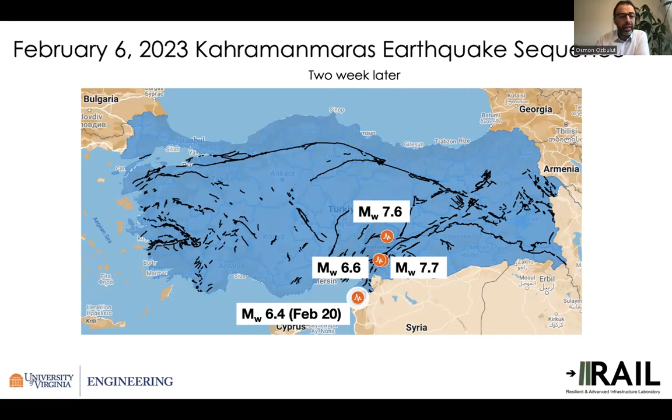About 2 weeks later, there was another aftershock in the region. That earthquake had a magnitude of 6.4 and affected mostly the southern province of Turkey. It also reached a significant intensity, so that's also an important event to consider.

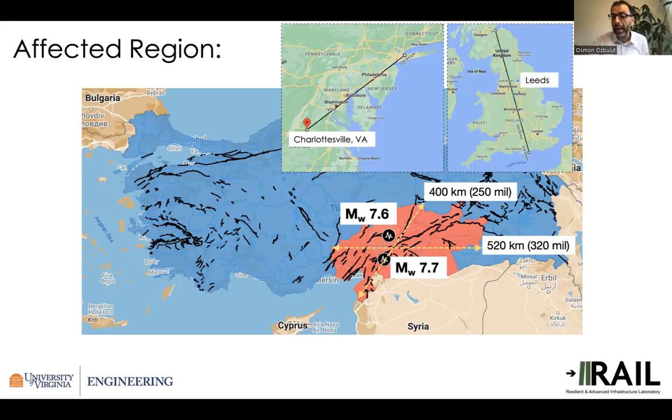So overall, after those events, 11 provinces in the southeastern part of Turkey were affected. When we look at this region, it's about 320 miles wide and about 250 miles in the north-south direction. To get a better sense of this region, if we compare this distance from Charlottesville, Virginia, where the University of Virginia is located, it goes up to New York City. And currently I am at the University of Leeds for my sabbatical, as Professor Ricles mentioned—when we compare this region, this 320 miles on the map is almost the entire United Kingdom.

The damage, or the affected region, was geographically really wide, and the damage to buildings was also really extensive. So maybe over 230,000 buildings collapsed or were tagged as needing to be demolished immediately, or were heavily damaged.

These over 230,000 buildings correspond to about 520,000 units or apartments, and if you multiply this by 4, assuming 4 people live in each unit, that makes over 2 million affected people directly from the collapsed or heavily damaged buildings.

The casualties were really high after these earthquakes, and it caused significant social and economic consequences to the region. When we look at the distribution of these damaged buildings across different provinces, this chart shows that 3 cities, Kahramanmaras, Malatya, and Hatay, included most of the heavily damaged or collapsed buildings.

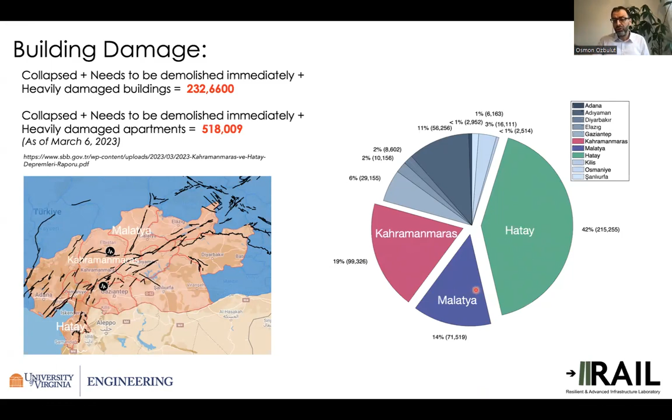The focus of my presentation will be two of these cities, Kahramanmaras and Malatya. When we look at the earthquake, there was this main shock followed by many aftershocks, but the main shock and aftershocks affected each of these provinces in the region differently.

To better understand that, let's look at one of these provinces, Hatay, in the south part of Turkey, which is the most heavily hit city in the region. The ground motion records were really high, and the intensity of shaking was very high in this part of the country.

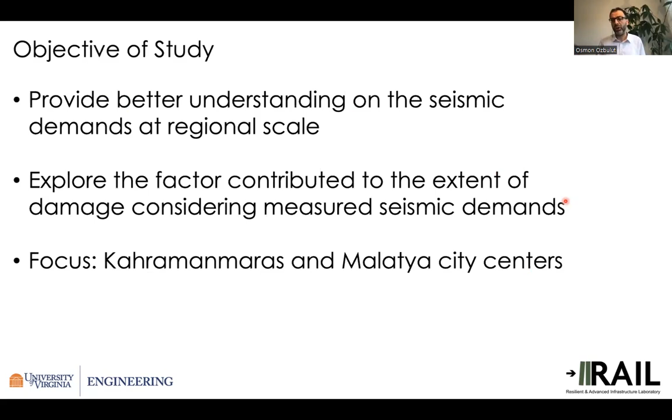I will go over two particular provinces, Kahramanmaras and Malatya, in this presentation, and then I will try to explore the factors contributing to the extent of the damage observed in these two cities, considering the measured seismic demands.

First of all, the ground motion records I use in this presentation were downloaded from the DesignSafe data center. Those ground motions were processed based on the PEER protocol and provided to the larger community for use. There were a few stations for Kahramanmaras.

There were a few stations where I downloaded the ground motion acceleration records from the Turkish earthquake data center system. Those ground motions were not included in the DesignSafe database, but they were in the city center for Kahramanmaras, so I included them in the analysis.

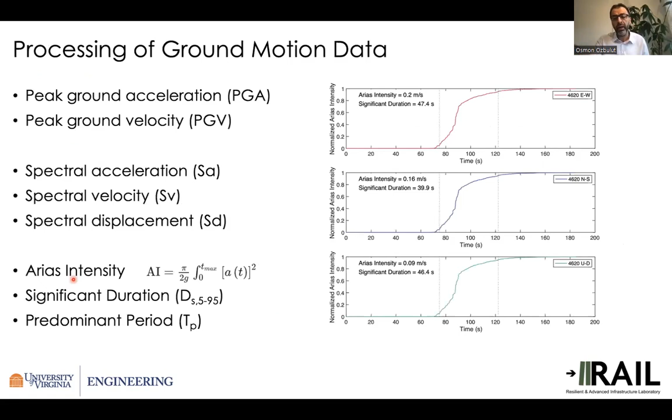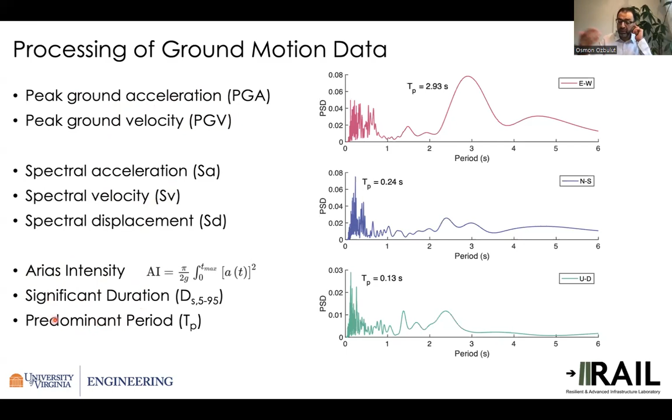For all of these ground motion records, I used the processed, corrected acceleration records and calculated a set of intensity measures to analyze the characteristics of these ground motion records. These parameters include peak ground acceleration, peak ground velocity, spectrum parameters, and other intensity measures that consider the duration and frequency content of the ground motion record.

First, we will look at the characteristics of those ground motion records in Kahramanmaras. Kahramanmaras is a city that actually included the epicenter of two of the main earthquakes, the magnitude 7.7 and 7.6 earthquakes. In the rest of my presentation, I will call the 7.7 earthquake the first earthquake and the 7.6 earthquake the second earthquake.

You may call those the main shock and aftershock, but we may get confused with the other main shocks that were intensive in the region.

To avoid confusion, I will use this convention: the first earthquake refers to the initial 7.7 magnitude event, and the second earthquake refers to the 7.6 magnitude event that occurred 9 hours later.

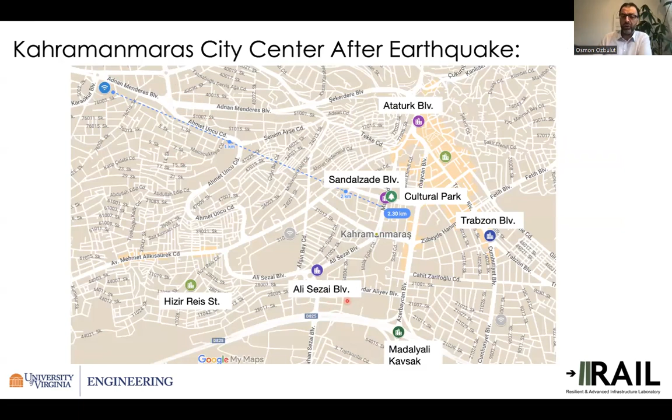I want to show you some photos from the city center of Kahramanmaras. Here is the Kahramanmaras city center. There was a close nearby station that we will talk about later.

I will show some pictures from different cities within the central area of Kahramanmaras. These original photos were taken in 2022 to promote and introduce the city, maybe for touristic purposes. After the earthquake, the same photographers went and took additional photos, comparing the before and after the earthquake in the region.

When we look at this first location, we see that these reinforced concrete buildings, maybe around 10 to 12 stories in height, all collapsed after the earthquake.

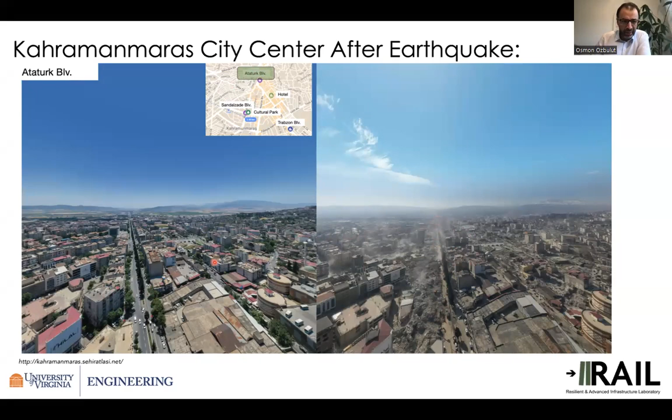Here is another street. Along this street, the buildings after the earthquake were mostly demolished on both sides. On this side, maybe a few of them managed to survive.

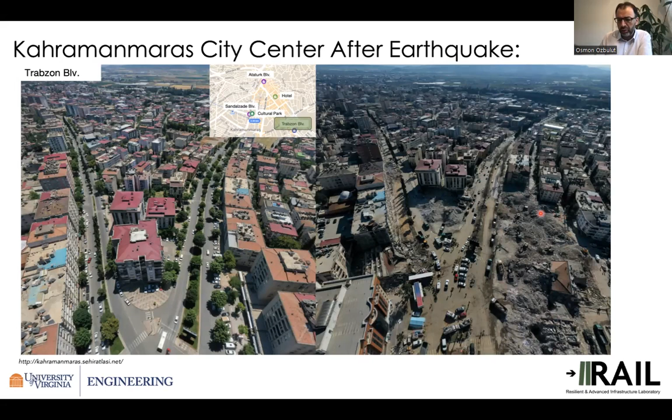If you look at this location here, again at the city center, this building collapsed after the earthquake, and when we look at several of these buildings, they were also turned into rubble after the earthquake.

Similarly, at another nearby location in the city center, when we look here, these concrete buildings all collapsed. Several concrete buildings in this region also collapsed after the earthquake.

As you can see, the damage and collapses have been really heavy at the city center of Kahramanmaras. So now let's try to get an understanding of what the seismic demands were at this city, Kahramanmaras.

One really good thing was that the Turkish National Strong Motion network was very dense in the region, with many different stations. Just in the Kahramanmaras city area, we have 22 stations, but within this wider region there were a lot of seismic stations, a wide network that helped all of us better understand the impact of those ground motion records.

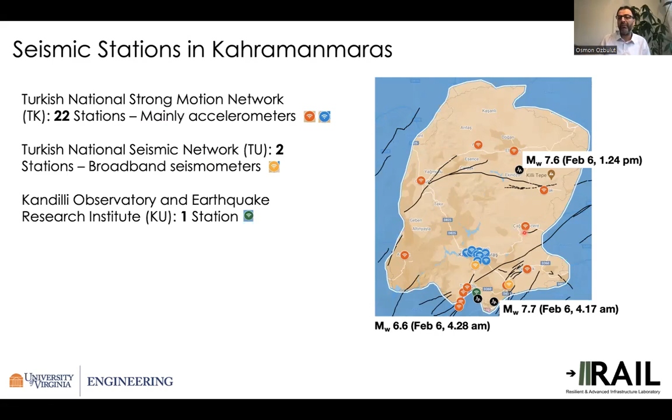In this slide you see all the stations that were available, but not all of them recorded ground motion records in both events. The stations marked in gray have no measurements, meaning we don't necessarily have recordings from the same station for both earthquakes.

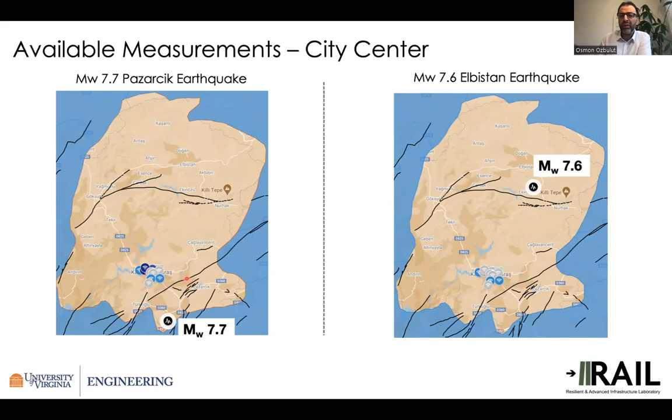But overall, we still have a good number of recordings at the city of Marash during both ground motion events. When we first look at the city center, the buildings I showed you were located there. If we focus on the city center and look at the ground motion records recorded during both events, zooming in, we see that during the first event we have 7 stations with data, while in the second event we only have data from 4 stations.

I marked these 3 stations differently: 4619, 4618, and 4621. Data for these 3 stations comes from the Turkish Earthquake Data Center, while for the other stations, the data comes from DesignSafe, which also obtained the data from the Turkish Earthquake Data Center and processed it themselves.

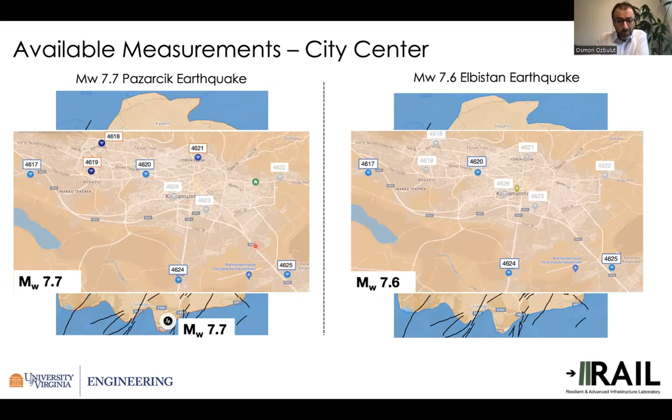When we look at the soil site class of those stations where we have measurements in the city center, we see that stations in the northern part of the city mostly have dense, stiff soil, whereas in the south part, 2 stations have softer soil conditions.

Now let's look at the PGA, going over different ground motion measures for the city center. The recorded PGAs for stations 4625 and 4624 were either about or above the design level PGA reported for the region in the Turkish building code. That's for the first earthquake. For the second earthquake, the PGAs were significantly lower for the city center.

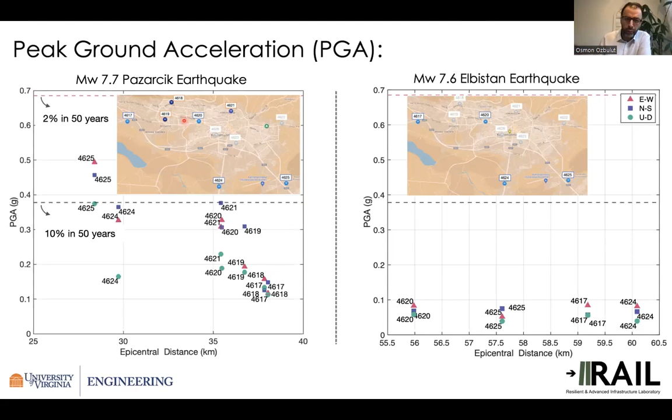These two stations had soft soil conditions compared to the other ones, but also these two stations are closer to the epicenter of this first event compared to the stations further north of the city.

Those stations record ground motions in three orthogonal directions, two horizontal and one vertical. Buildings may be subjected to these ground motions in any direction, so here I also consider directionality and computed the ground motion records considering different orientations. I'll be reporting some RotD100 or RotD50 values, which correspond to either the 100th percentile or the 50th percentile of the response quantity compared to the as-recorded horizontal components.

If you look at the PGAs considering directionality, we see that for some of those stations we have slightly higher PGA levels for the RotD100 measurements.

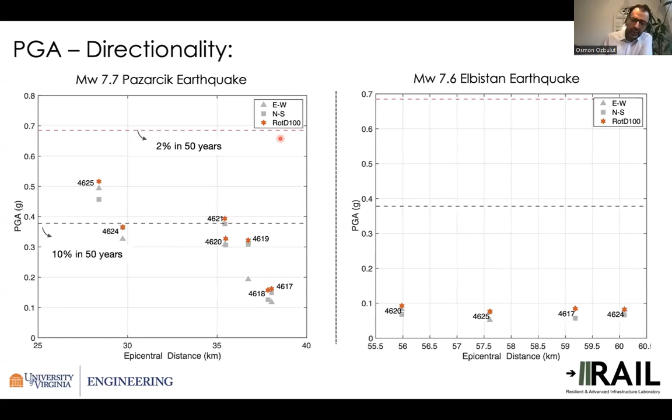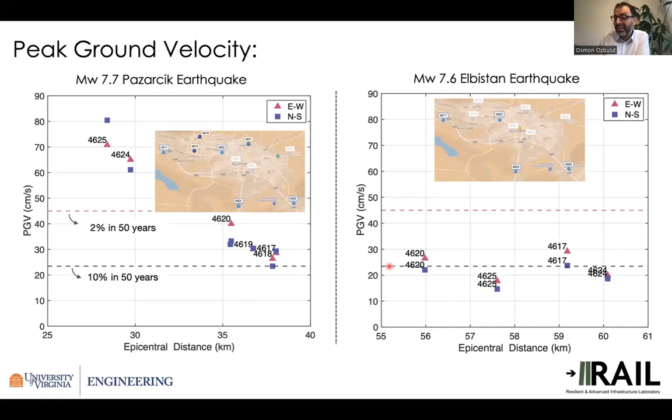If we continue and look at the peak ground velocities for those city center stations, we see that again these two stations reported quite high peak ground velocities. Overall, the second event's peak ground velocities were lower compared to the first, but they were around the design level PGV specified in the Turkish building code.

When we look at these high PGV values for stations 4624 and 4625, these two stations had the highest PGVs. Those stations were closer to the ruptured fault, and you see here a pulse-like record measured from 4625. That was the main reason for the higher PGVs observed for those stations closer to the fault, which recorded pulse-like motions.

When we look at the Arias intensity of the recorded ground motions, these two stations located on the south part of the city center had really significant Arias intensities. Stations 4620 and 4621 also had higher Arias intensities compared to the other stations observed here. For the second event, the Arias intensities were considerably lower compared to the first event.

For all of those stations, the significant durations of the recorded motions were between 40 to 50 seconds for both events. When we look at the predominant period of the recorded motions for the first event, we see more stations with predominant periods below 1.5 seconds, while for the second event we have stations reporting higher predominant periods, especially over 1.5 seconds for most of the records.

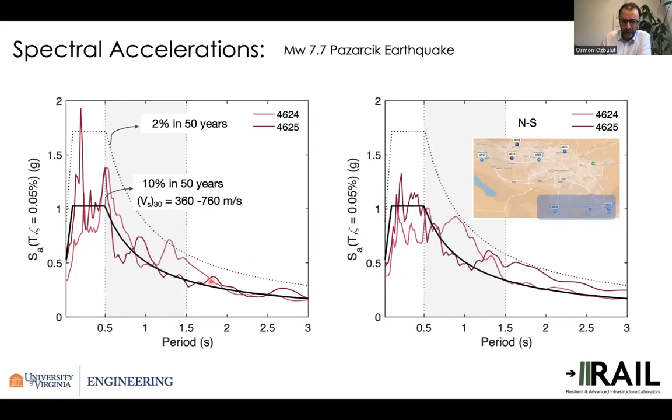When we look at the horizontal spectrum for all those ground motion records at the city center, for higher periods we see that these horizontal ground motions had higher spectral accelerations compared to the design spectra. For the second event, the spectral accelerations were considerably lower.

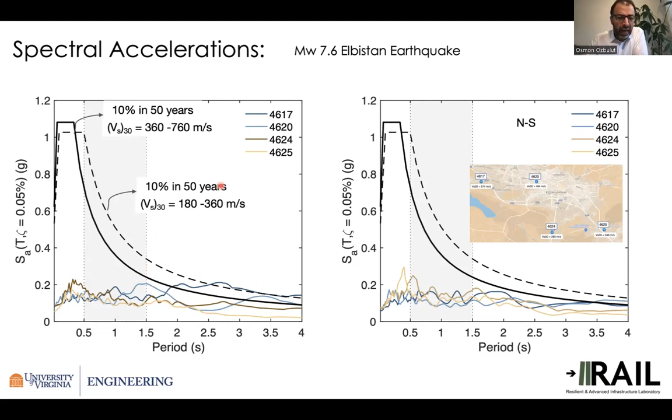Here I marked this region from 0.5 to 1.5 seconds, because most of the buildings in the city center range from 6-story up to maybe 12-story buildings. But we see that at higher periods, the second event also had high spectral acceleration values for some stations, and here you see the vertical spectral accelerations for the city center for the second event.

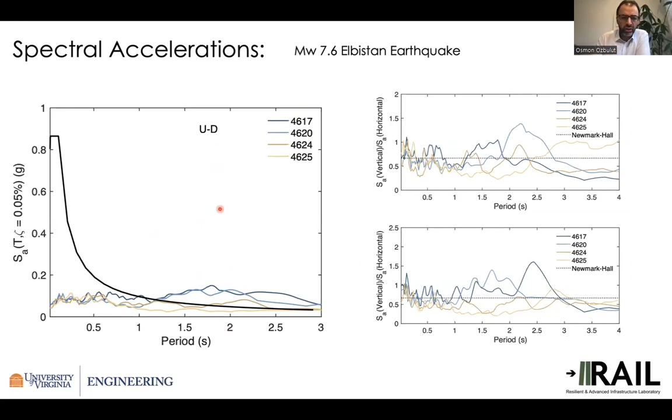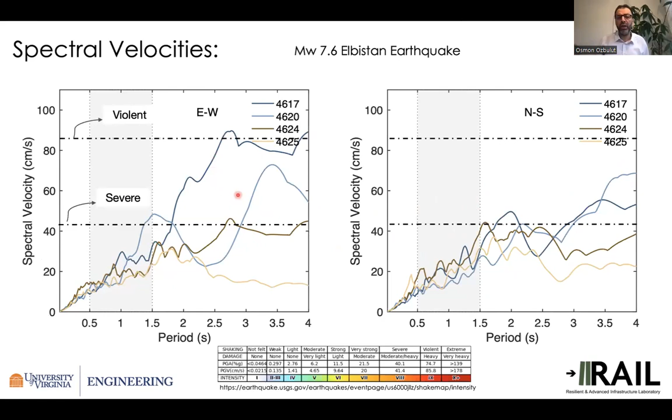When we look at the spectral velocities from all those stations in the city center, we see that the spectral velocities were really high for stations 4624 and 4625, and relatively significant for the other ones as well. During the second event, compared to the first event, we see lower spectral velocities, but still at higher periods we have some high spectral velocities for some of those stations.

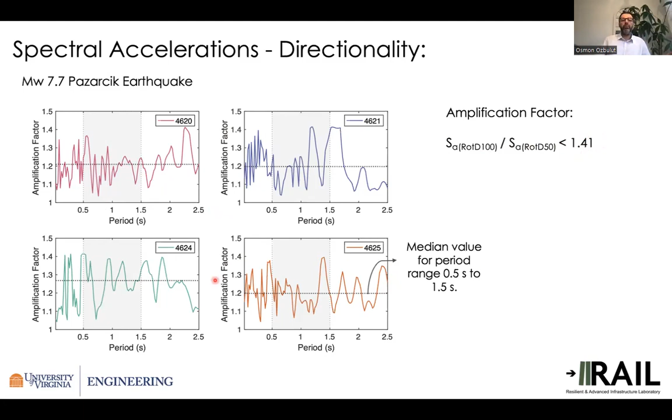So for different periods, the ground motion was polarized for certain directions. To better assess the magnitude of this polarization, I calculated the amplification factor using the ratio of the spectral acceleration for the RotD100 to the RotD50. That ratio was shown to be below 1.41, and for this case, the median values for the period range from 0.5 to 1.5 changed from, let's say, 20 to 30% for different stations.

So if we summarize the intensity of the shaking within the city center for Marash, during this first earthquake it was at design level on average, although we observe quite high PGV values for some of the stations, especially the ones located on softer soil conditions and in the southern part of the city.

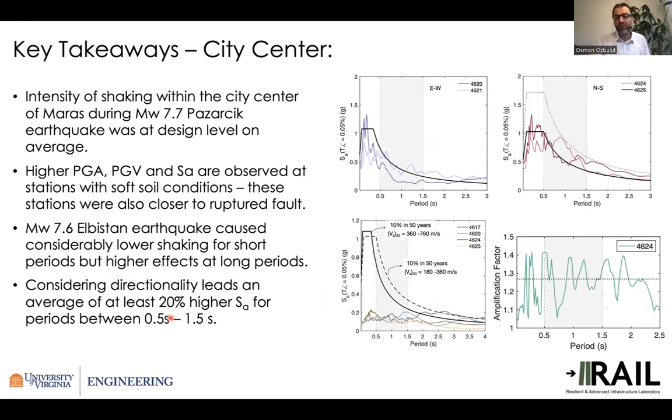When we look at the second earthquake, it mainly caused higher spectral accelerations at higher periods. And when we look at the directional effect, we can see there are about 20% higher spectral accelerations when you consider directionality. So just to give you a complete picture, I will quickly show also the ground motion records measured at the greater Maras.

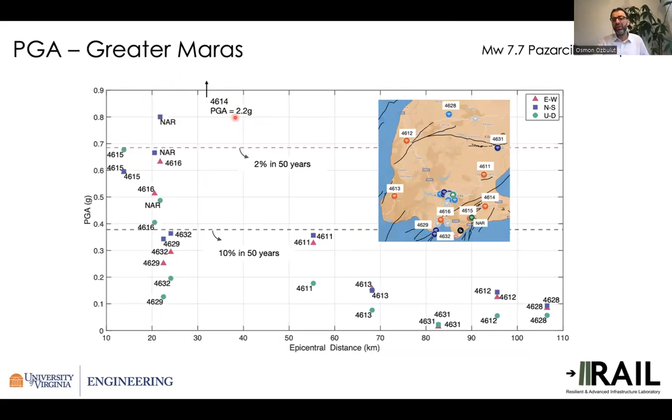So overall, those stations recorded higher PGA values. You see some of them here. Even in this station 4614, the PGA reached 2.2 G. So extreme values for some cases, but again, those stations were not necessarily at the city center.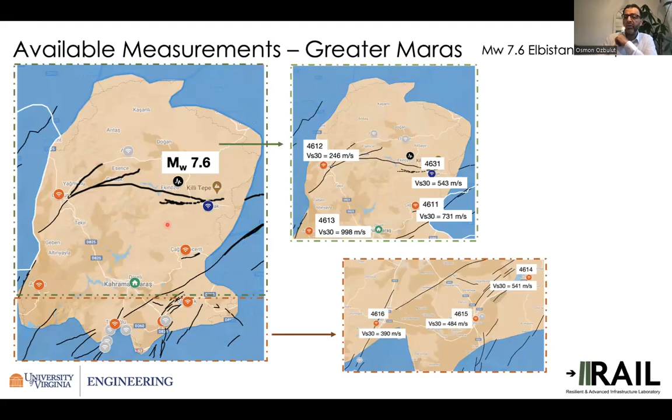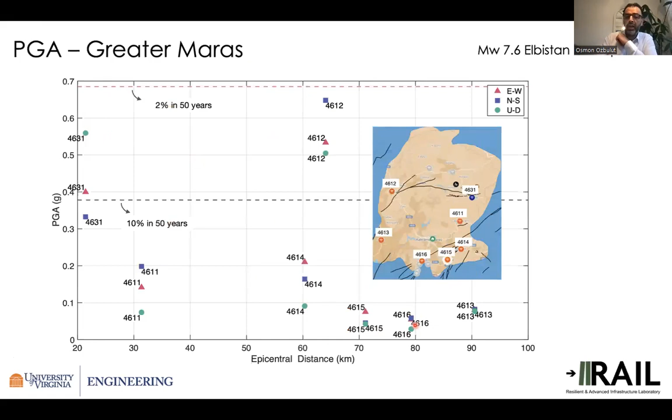During the second event, which occurred on the Surgu Çardak fault, the stations at the northern part of the city recorded higher PGA values compared to those in the south. Again, the spectral accelerations were really high for the northern part, but relatively lower for the south part of the region. And the directional effects were more pronounced, as you can see in this spectral acceleration plot for this region.

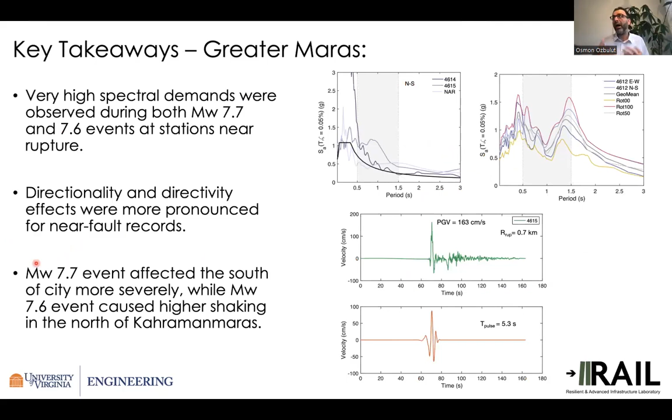So again, just to give you the complete picture, the greater Maras experienced higher ground motion, or higher intensity of shaking, compared to the city center.

Now, if we come back to the city center and try to understand what happened to those buildings that collapsed, first, quickly, the Turkish building code evolved during the years, and there were updates. The latest update was in 2018. So some of those buildings were designed based on the old codes, but some of them were relatively newer buildings.

We need to consider that, and another important factor: after the 1999 earthquake in Turkey, the building inspection law was introduced for 19 provinces as a pilot project, but only 3 of those provinces in the affected region were included in this pilot project. In 2011, this building inspection law was enforced for all provinces, and in 2021 it was further improved by adding more transparent regulations.

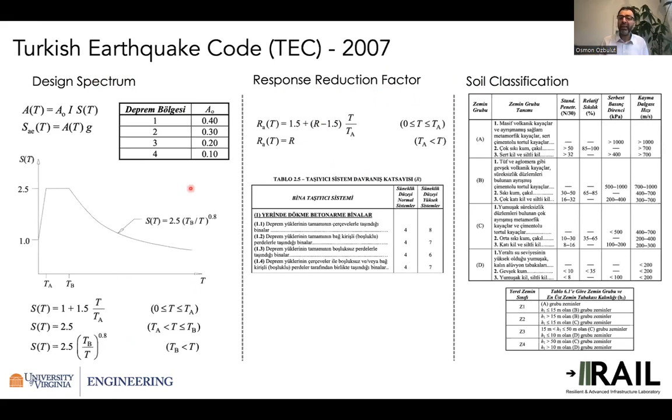So when we look at the 2007 code, the design spectrum, response reduction factor, and soil site classification defined in this code versus the 2018 code were different. There were several changes, but maybe one measure is the design spectrum. The ductile RC frames had R of 8, moment frame was 8, and 6 for shear wall buildings. They remained the same, but the definition of R also changed. The definition of the site soil classes changed in these building codes.

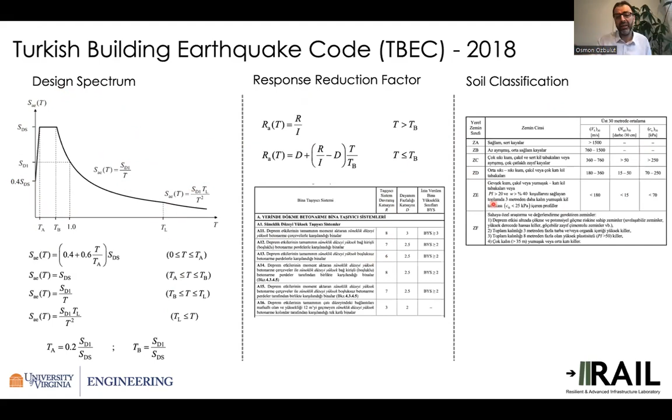There were also updates on the seismic hazard maps in 1994. Here you see 4 different earthquake zones, and in 2018 there was more site-specific mapping of the hazard, and you were able to get your response spectrum values depending on your site.

Another important thing to note is that the construction material quality also improved throughout the years.

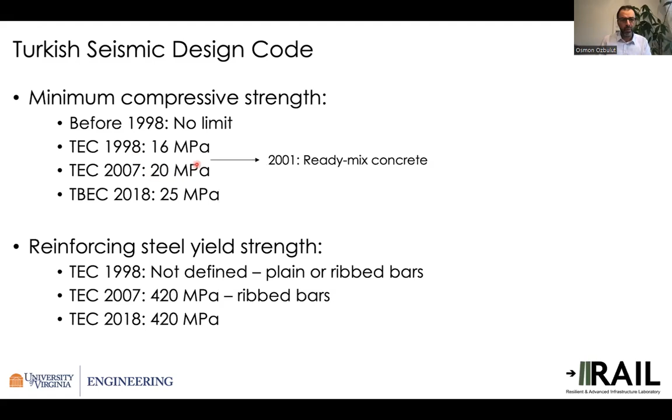So some of the older buildings are using the lower quality material, just keep this in mind.

When we look in the next slides at the effects of the earthquake on these different buildings, to help the comparison, I calculated this design base shear ratio, the earthquake design base shear computed based on the measured spectrum, divided by the design base shear computed following the building code, either 2007 or 2018. If this ratio is less than 1, the earthquake loads are smaller than the design loads. If greater than 1, earthquake loads are higher than design loads.

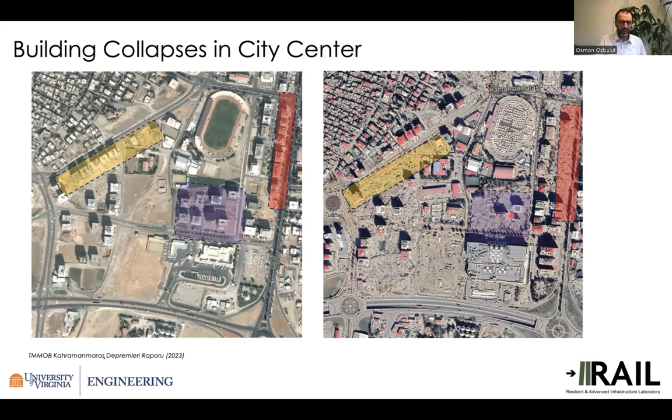Now, when we come back to the city center of Maras, let's look at this image. Here you see a set of buildings, all collapsed or demolished after the earthquake. Similarly, along the street, these buildings were totally wiped out. In this region, only a few buildings remain, but the rest were either collapsed or demolished. So let's try to understand what happened, what was the seismic demand during those earthquakes in the city center.

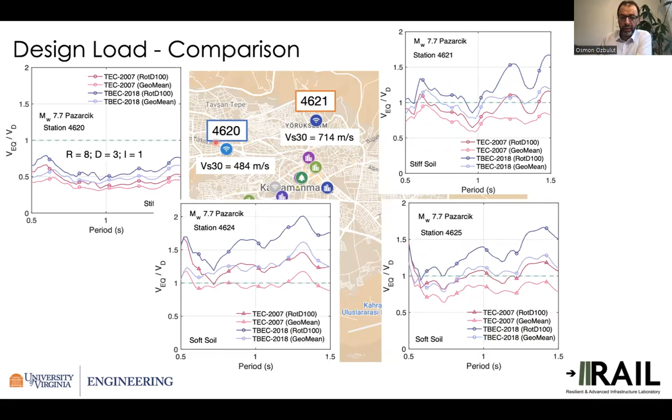When we look at station 4621, for the newer 2018 code we see really high values sometimes, but for the old code, mostly below the design level. Similar things can be observed for these two soft soil stations, 4624 and 4625, where we had higher ground motion records, but again they are located further south, closer to the rupture compared to this station and the city center.

When we look at the earthquake load demands during the second earthquake, now we see relatively higher demands, but at larger periods that becomes more prominent, especially when you consider the directionality effects.

Again, during the second earthquake, these two stations located in the south were away from the ruptured fault, and for them the earthquake loads were even lower compared to the design load. But still, we had quite significant effects during the second earthquake.

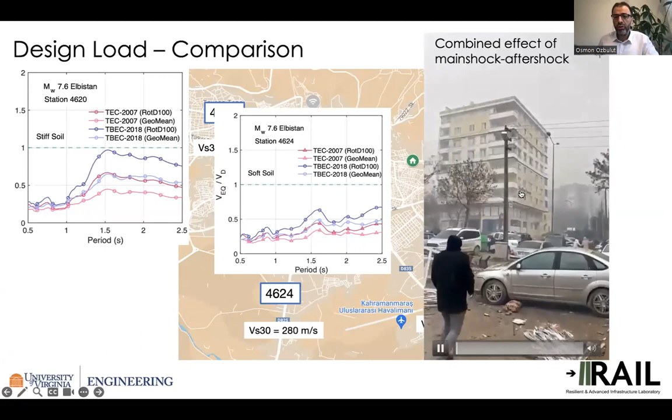In this video, you see one building here in the background. This is during the second earthquake, and it will collapse at the city center of Maras. You see this building shaking, maybe with a kind of soft story here. But this building at the back has collapsed during this second earthquake.

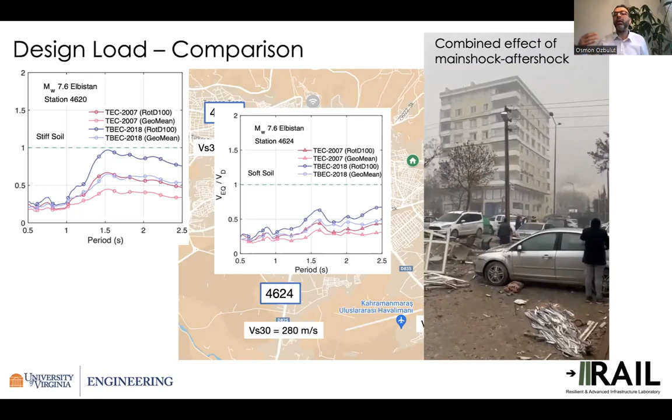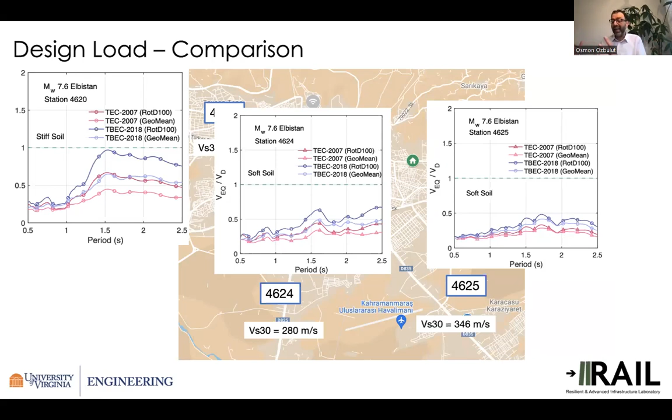So although the design loads were lower during the second earthquake, first, the second earthquake had larger demands for higher periods, and considering that during the second earthquake the buildings had damage and their period had lengthened, that might have contributed to some of the damage observed.

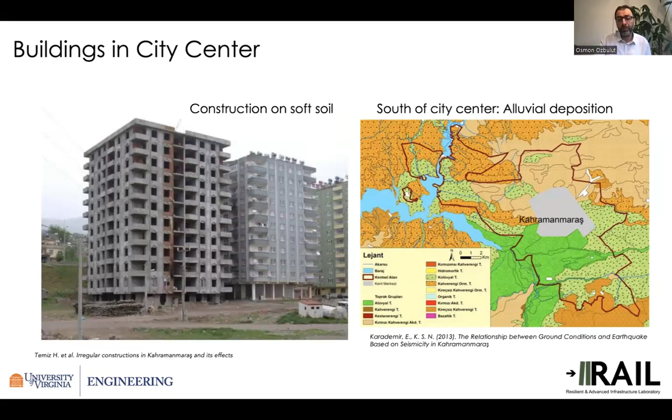Another factor is that the city of Maras was originally established at the outskirts of the mountainous area, but over time moved to the valley, and most of the later buildings were designed on softer soil, on alluvial deposits. That's another factor contributing to failures.

When we look at the design of some of those buildings in the city center, you see the ground floors are set back from the upper floors, usually used for commercial purposes. That might have also contributed to some of the soft story failures observed during the events.

And of course, look at these three buildings in this image. These three buildings were designed and constructed at the same time, maybe by the same company. But when we look at these two more regular buildings, the irregularity in the plan might have contributed to the collapse of this building here.

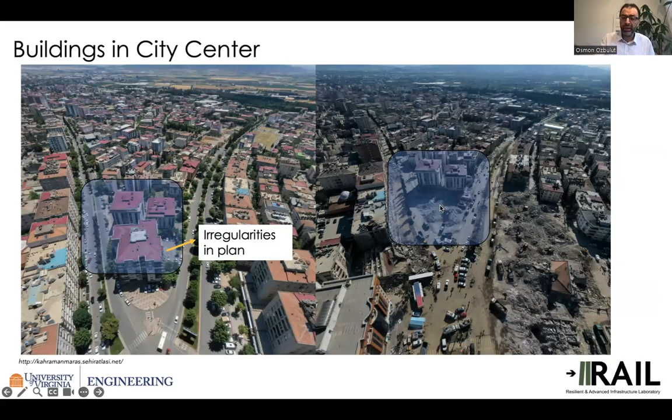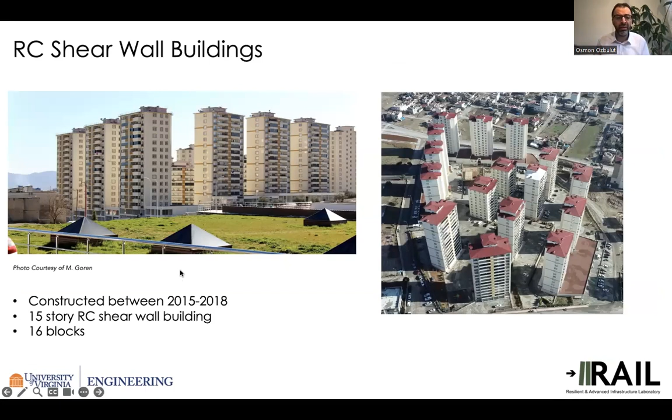When we look at some of the RC shear wall buildings, those are relatively newer buildings located close to the city center. We see these 15-story buildings, and we also observe damage and collapse. Actually, two of the buildings collapsed during the earthquakes, and some were demolished afterward. There was a station just 3 kilometers away from this region.

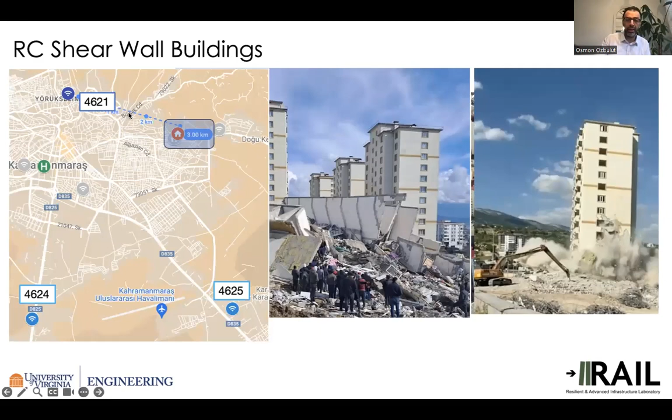When we look at the demands, those are buildings designed between 2015 to 2018, probably according to the 2007 code, where we mostly estimate a design level demand for those buildings. But notice the higher demands for the 2018 code - although short period spectral accelerations increase, in the long period region we mostly see a decrease in the seismic map values for the design spectrum. That might be the reason for that.

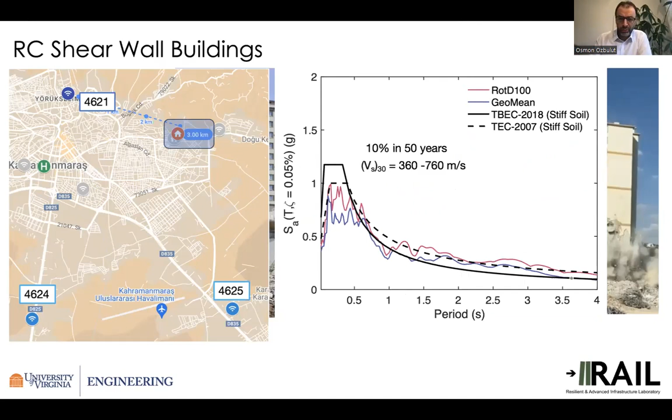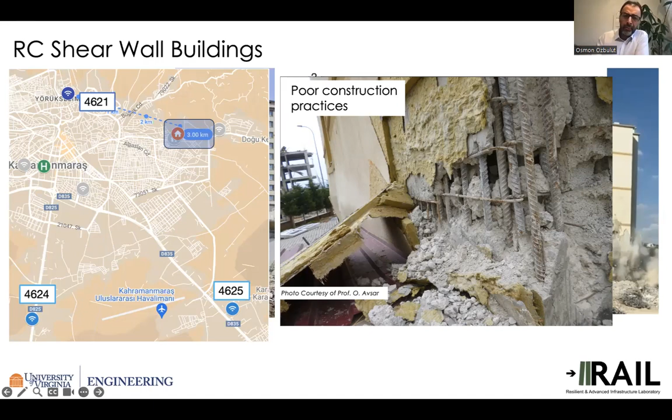And of course, for the damage or collapses in these buildings, one reason was poor construction practices. Here you see the damage on the shear wall - not enough concrete cover, not good detailing in this shear wall might have contributed to the collapse of this building.

Some of the hospital buildings in the city center: here we see Kahramanmaras City Hospital, constructed in 2012, an RC shear wall building. The hospital's structural system remained intact, but there was significant non-structural damage. The demands on this building were even below the design level demands.

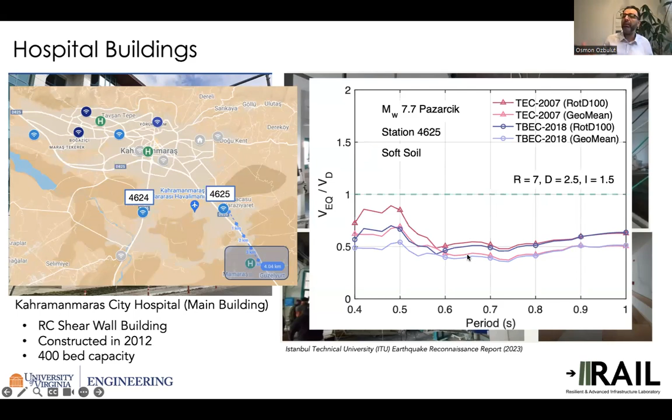Another hospital, also in the city center, is an RC frame shear wall building, a relatively older building, but it performed quite well. From the closest station, if we look at the demands, they were considerably lower compared to the design base shear.

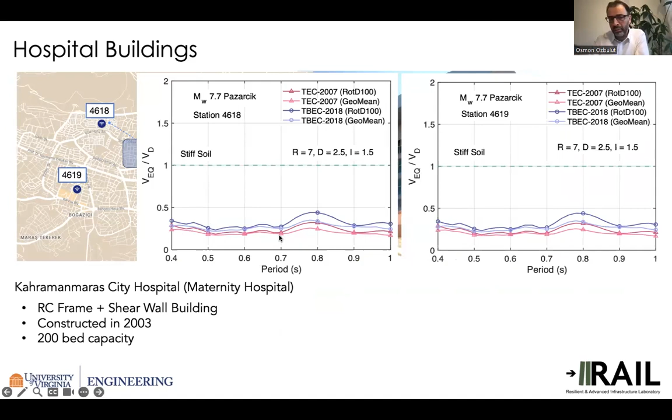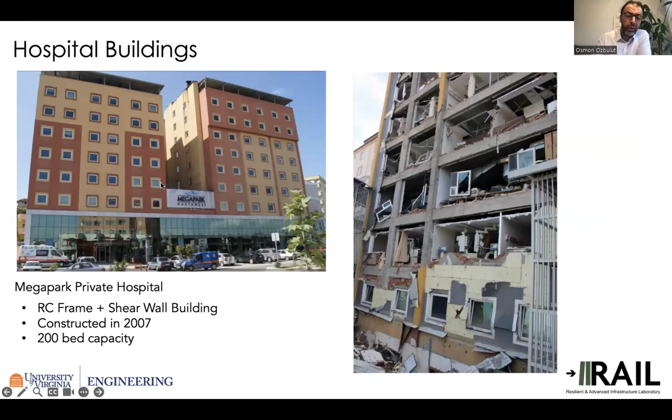Here is another hospital building, again in the city center. This building did not have significant damage to the structural system, but significant non-structural damage was observed, and this building was demolished after the earthquake. But when we look at the demands on this earthquake, they were quite low for this building, so such extensive damage was not expected.

Now I will quickly go over some of the ground motion records recorded in Malatya, another district. Here are the available stations in Malatya.

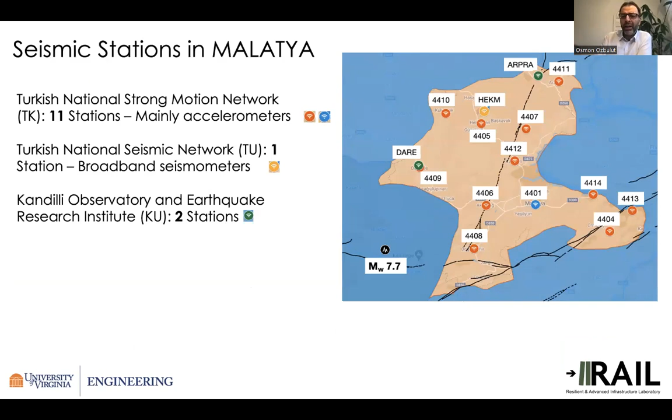Again, from the first and second earthquake, we have ground motions recorded at select stations, but the city center for this case corresponds to this location, where we had a station, but neither during the first earthquake nor the second earthquake were we able to get any measurements at the city center.

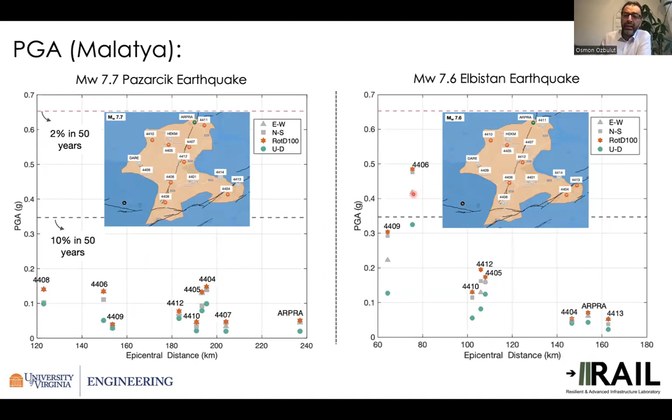First, I want to show you all the ground motion records from all the stations. Only this station 4406, during the second earthquake, had ground PGA values higher than the design PGA level for this city. And when we look at the PGV values, they were high for some of the stations.

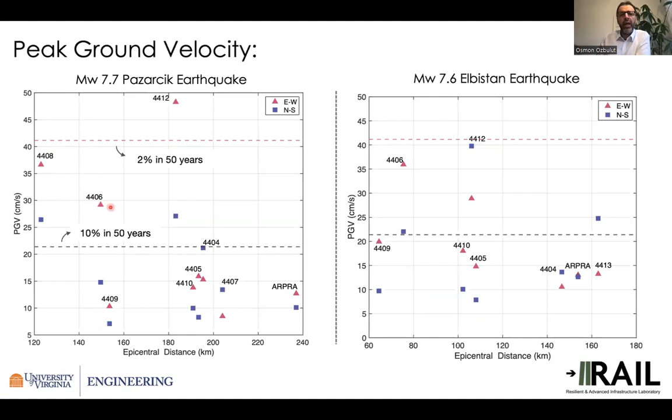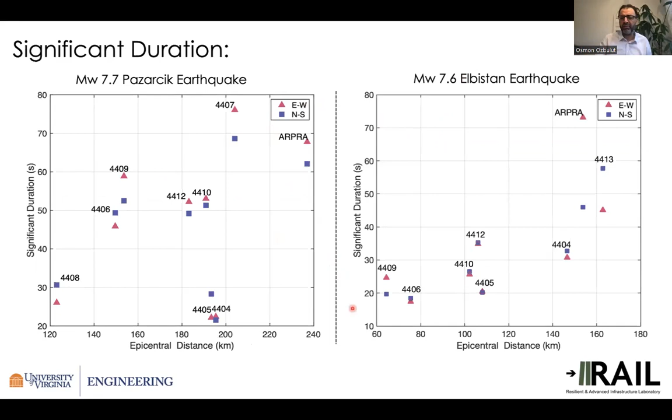Mostly near to or closer to the rupture faults, the Arias intensities were considerably lower for most stations compared to station 4406 during the second event, where we have higher Arias intensity. The significant duration for those records varied - different stations had different durations, and predominant periods similarly did not show a clear trend across stations.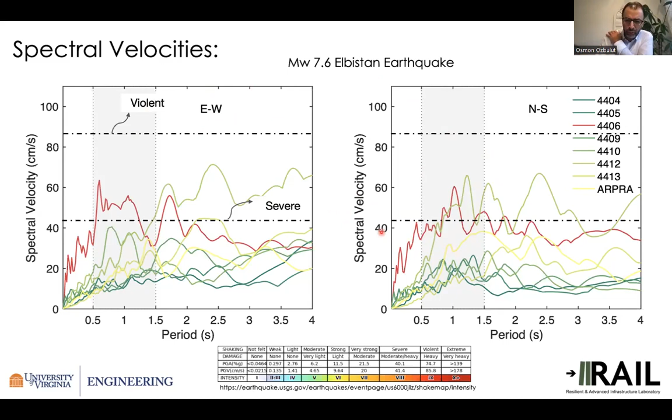So now when we look at the city center, we will be focusing on the city center and look at the performance of some buildings there. This time we don't have that many stations nearby - the closest one was about 30 kilometers away from the city center: stations 4406, 4412, and 4404.

These three stations recorded ground motion records during both events, but stations 4408 and 4413 just recorded during one of them. It would be great to get a record at station 4408 during the second event. In this second event, the rupture was along this fault, and station 4408 is up there, but we don't have any recording for this station during the second event.

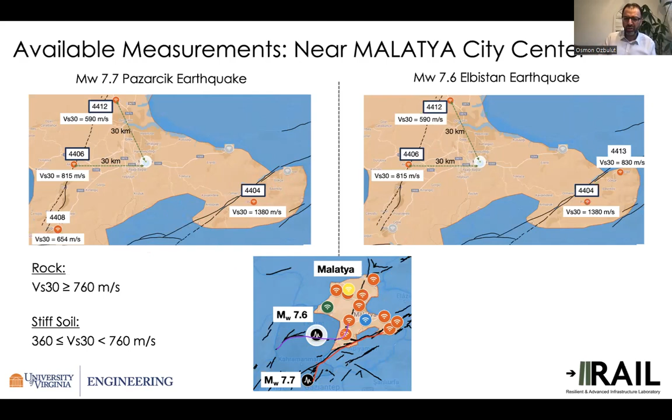So here is the city center. The closest two stations are there, and we will look at the three buildings at this location and their performance.

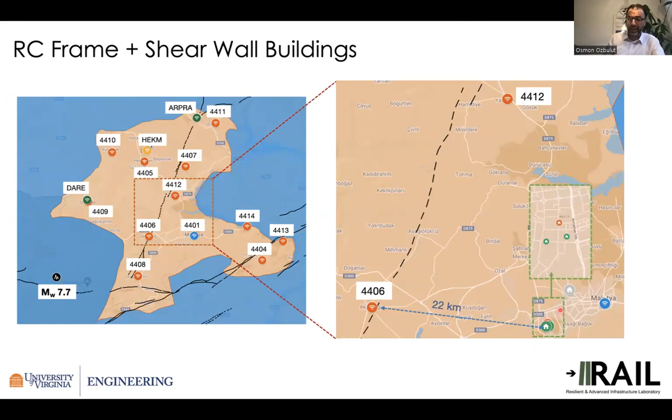Those are relatively newer reinforced concrete residential buildings. This is an 11-story building. After the earthquake, there was quite a bit of damage, both non-structural and structural, in the building. Here you see the damage on this shear wall.

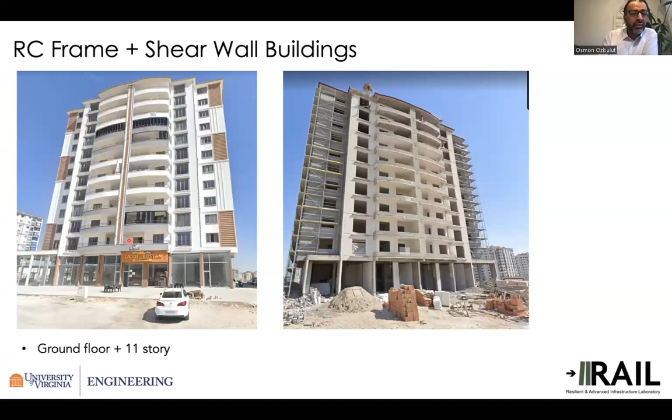And here is another building, a 12-story building, again in the city center. Here is an image during the construction of the building. After the event, here again, these photos were taken by a group of Turkish faculty who visited the region under the leadership of Professor Erkut Sayın. And you see again those shear wall damages in this building after the earthquake.

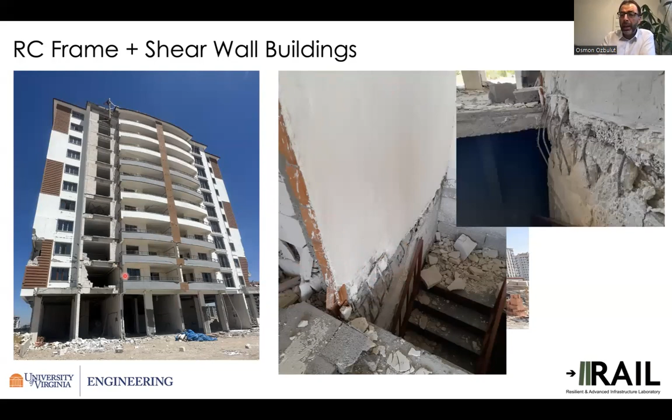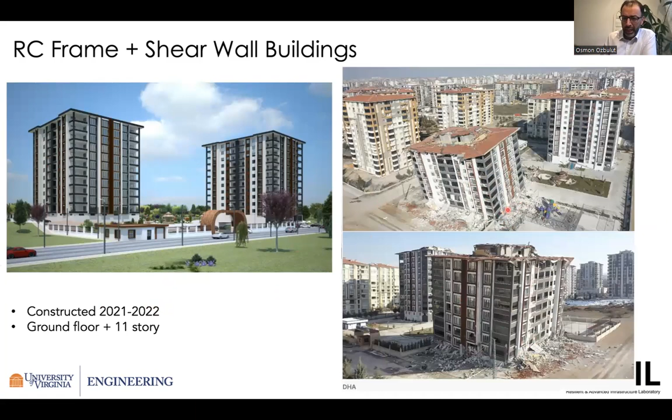There was another building where actual collapse occurred. Again, the same site, the same location, a 12-story building, which also got some attention in the media. In that case, this building had a kind of soft story collapse during the earthquake. Look at this second pair of this building - it just survived, but the second earthquake had the soft story failure.

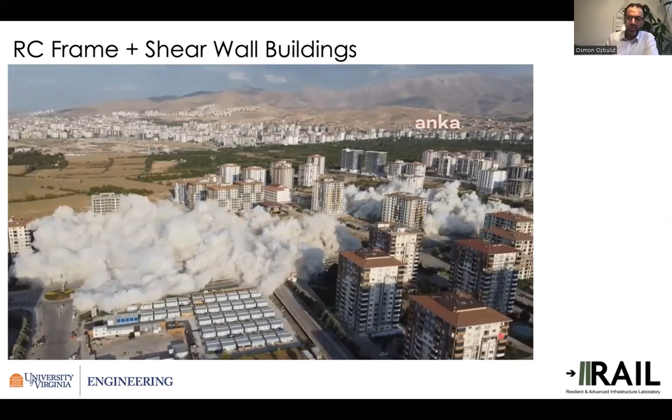So if we look at this same region that I showed you some of the examples after the earthquake, many of these buildings that were tagged heavily damaged were actually destroyed or demolished. So here you see just a video of this demolition.

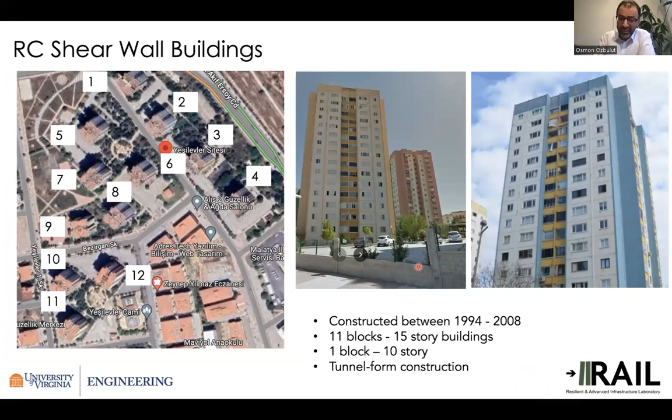And very quickly, I will also show you an example of the shear wall buildings that were further north of the city - those are like 15-story buildings mostly. I don't have much information about the damage observed in this building, but that's one photo that I have seen, and maybe from this photo we may infer some settlement issues in this particular building. But those are the shear wall buildings.

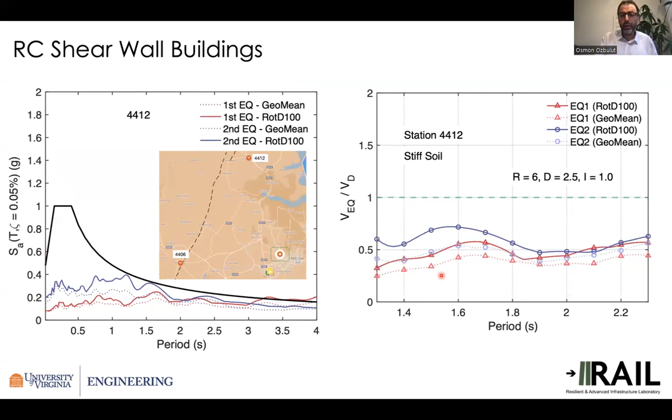When we look at the demands, they were lower than the design level demands, but those 11, 15-story buildings were all also demolished after the earthquake. So that is a video showing the demolition of these buildings after the earthquake. Those buildings were relatively older, designed or constructed starting from 1994 up to the 2000s. So they were relatively older, but all shear wall buildings, they were demolished.

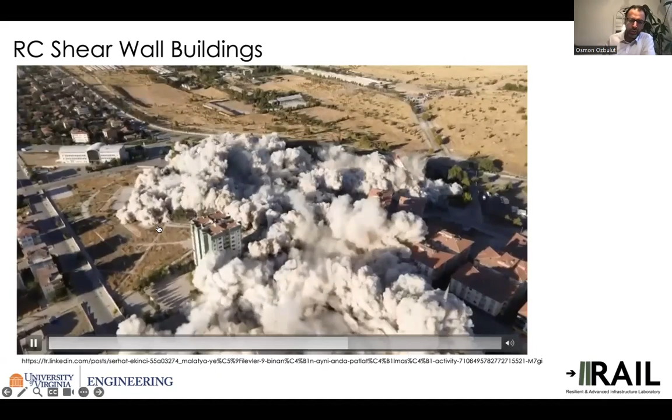Here is a 10-story building that remained, but 11, 15-story buildings were demolished. And very quickly, I will also show you the performance of 3 base isolated buildings in the city center.

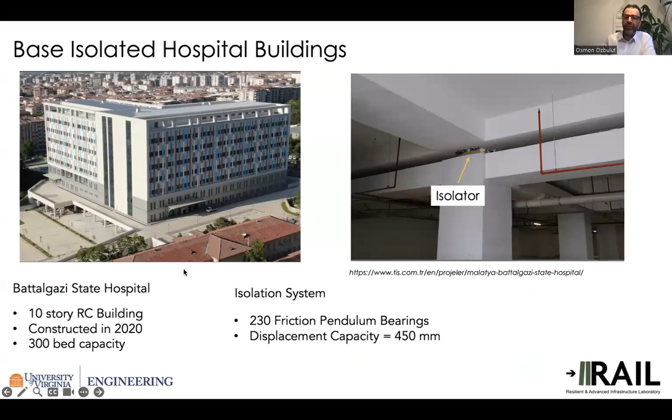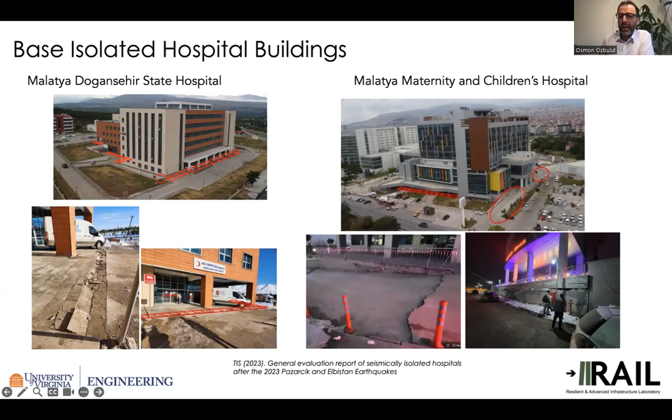Those 3 buildings were in the city center, isolated with friction pendulum bearings of different capacities. They are mostly relatively new buildings, and those buildings perform quite well. There were some issues in two of the base isolated buildings, but those were mostly due to things like the seismic gap or moat being closed, preventing movement of the building. Otherwise, as reported by the producer of the isolators, the isolation systems performed well, except where movement of the isolators was prevented. Looking at the demands on these buildings, the isolation system reduced the demand by about 10% of the earthquake demand.

So to conclude, we can see that buildings 10 to 11, up to 15 stories, located on soft soils were vulnerable. Buildings with soft stories at the ground floor were another vulnerable group. Poor construction practices and low quality construction materials contributed to failures, especially in older buildings. We also need to consider the compounding impacts of the earthquakes. For hospitals, both fixed and isolated buildings performed well structurally, but non-structural damage was observed, especially in fixed-base buildings. It's also important to account for directionality—there was about a 20 to 30% increase in seismic demands when directionality was considered. The latest 2018 code and seismic maps usually estimate high period demands lower compared to previous seismic maps, and that deserves more attention.

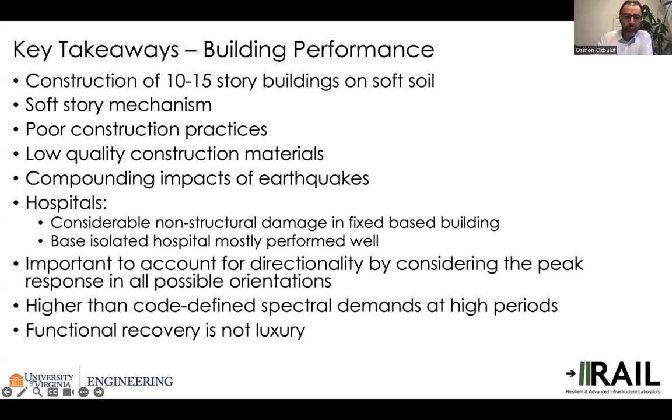So are there any questions from the audience? Sorry, go ahead, Tommy. Yeah, I was going to say, at this time if anybody has any questions, you can put them in the chat Q&A or raise your hand and we'll let you talk. Osmon, I had a question, but I can wait for the audience to ask theirs. Sure.

Maybe what I'd like to ask is, I noticed toward the end of your presentation, the base isolated structures tended to perform reasonably well, but the non-structural elements did not—basically dysfunctional. Do you have any sense what you could attribute that to? Are there still accelerations, say in the higher modes, that caused that? The interior contents as well as the cladding seemed to both be damaged in some of those hospitals, or was it primarily interior contents?

Yeah, for one of the base isolated buildings in the city center of Malatya, there was not even considerable non-structural damage, so that performed well—the application of the isolation system was more proper there, with no blockage of the movement, so it performed quite well and was able to reduce non-structural damage as well. Two of the base isolated hospitals where we saw some non-structural damage had issues implementing the seismic gap, which was either filled with gravel or a kind of pavement, preventing movement of the building. I think that was one reason for the considerable non-structural damage observed in one hospital, but all those isolated buildings remained functional and operational after the earthquake. The fixed buildings—some of those hospital buildings had really significant non-structural damage and had to be closed after the earthquake.